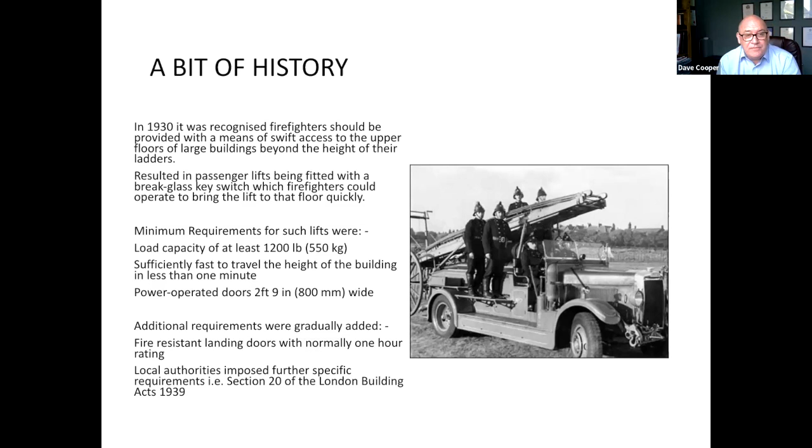So common standards for lifts were formed into BS 2655 Part 1 1970, which specified requirements for firemen's lifts. 2655 was the general standard for lifts, and in 1979 this was superseded by BS 5655. This required a larger car size, as I said, 630 kg, and improved protection by the building of firemen's lifts, which I'll cover in a minute. Published in 1986, BS 5588 Part 5 included the first requirements for a firefighting lift. So not a fireman's lift, a firefighting lift. And I will go through the differences shortly. And revisions were updated in 1991 and 2004.

In 2008, there was a shift. The contents of 5588 Part 5 were incorporated into BS 9999, which is about fire safety in buildings. And 9999 didn't contain the requirements for a firefighting lift. It just generalised about the requirement for one. But it does still talk about the fabric of the building, compartmentation and that sort of thing. Next slide, please.

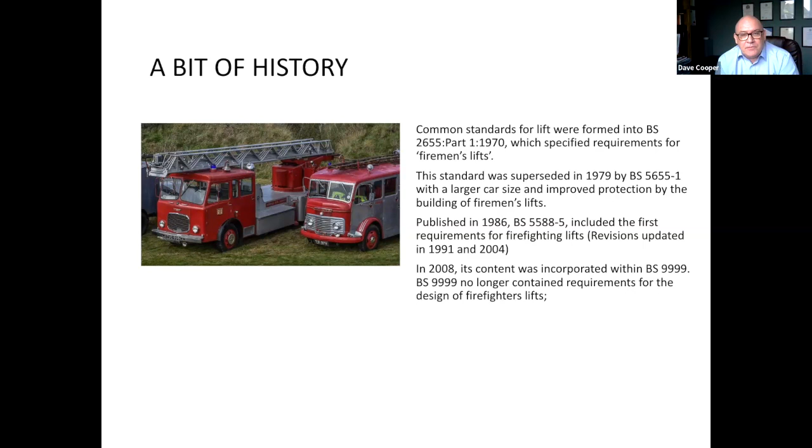So when EN 81 Part 72 came out in 2003, this was the first European standard for firefighters, BS EN 81. BS means it's been adopted by British Standards, EN means it's a European norm, so it applies all around Europe, whereas BS 9999 and 9991, which we're just about to cover, they've only got a BS in front of them, so they're parochial to Great Britain only.

So since EN 81-72 came out, BS 9991 has also been published, and that covers residential buildings. Incidentally, there is a 9992 which covers railway buildings, but that's outside the scope of today. EN 81 Part 72 was further updated in 2015 and 2020. You can see the standard there on the right. So you can see there have been some shifts.

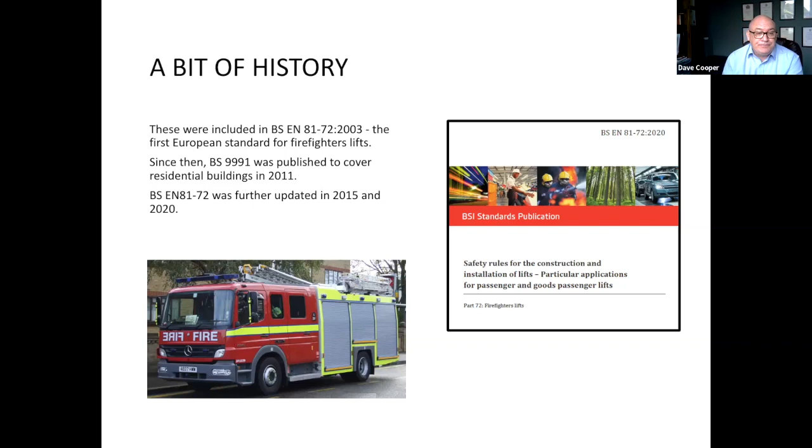So the Fire Safety (England) Regulations 2022: for lifts which fall under these regulations, the responsible person must undertake routine checks of any lift that is for use by firefighters and evacuation lifts. These are checks that the lift is in efficient working order and in good repair. And Andrew will cover these in detail later on. They include weekly, monthly, and an annual performance inspection.

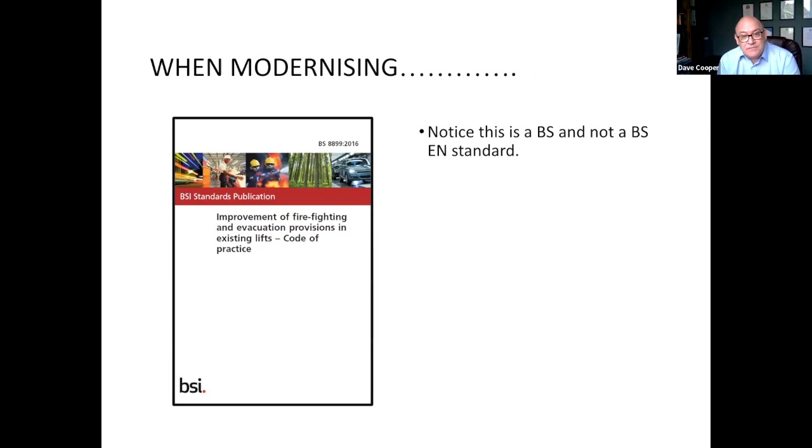So let's have a look at the difference between a fireman's lift and a firefighting lift. So a fireman's lift is now basically an obsolete term, but the facility is often retained in older lifts that are being modernised or upgraded and have the facility. The system is extremely simple in that there's a switch at the main floor, which when operated, causes the lift to stop at the next floor if it's in travel, not open its doors, and illuminate an indicator in the lift car stating it's on fire recall service.

The lift returns to the floor where the switch is located and parks with its doors open. The lift will then only respond to a call placed on the system within the lift car and will go to that floor and park with its doors open. The system can be specified for new lifts or those being modernised, but must not be confused with a firefighting lift. Next slide, please.

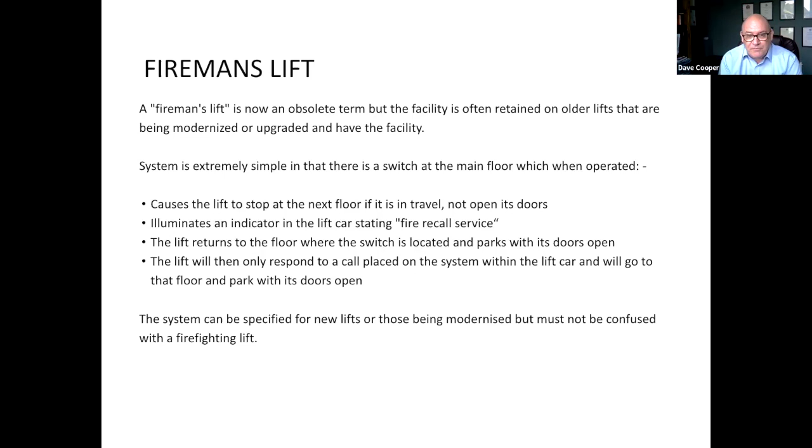So a firefighting lift, a completely different animal. A firefighting lift must have the following safety features as a minimum. Minimum 630 kg, that's an 8-person lift car. Minimum car interior size of 1400 by 1100. It must travel the height of the building in less than 60 seconds. That includes acceleration and deceleration.

It must have automatic power operated doors, at least 800 millimeters wide and 2000 millimeters tall. Position indicators fitted inside the lift car and at the fire service access level. There should be a two-way intercom provided between the machine room, lift car and fire service access level. An emergency trapdoor should be provided in the car roof with a minimum size of 400 millimeters by 500 millimeters. The lift should not be used for goods transportation in general terms. Next slide, please.

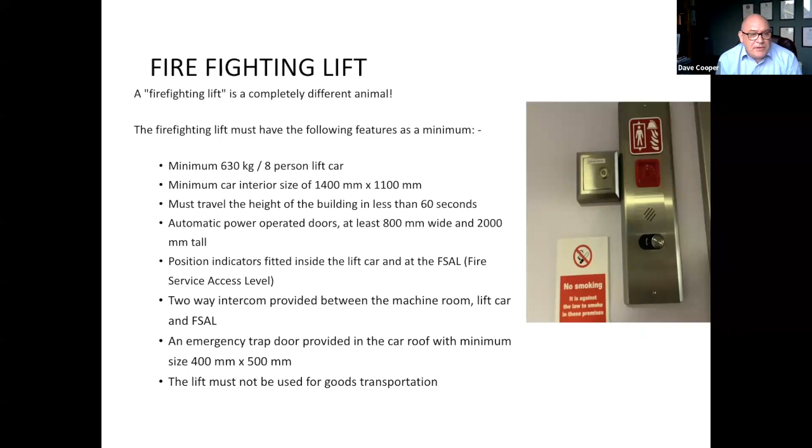So rescue shall be available from both inside and outside the lift car. So there could be a ladder stored inside the lift car, for instance, or on top of the lift car. Buttons shall be protected against water ingress. A firefighter's hose emits 25 litres a second of water. It's quite forceful. Electrical equipment in the shaft shall be protected against water ingress. An audible fire alarm must be fitted to alert a maintenance operative of the firefighter in need. If they're maintaining the lift at the time, they should have heard the fire alarm within the building, but they should get an indication that the lift is required.

A secondary power supply must be provided. The shaft must be protected from water ingress by drains and/or ramps. A peekaboo control system when on firefighting mode shall be included. A peekaboo control system is very different to the old system on the fireman's lift, where the lift just went where it was and parked with its doors open. On a peekaboo system, when the lift arrives, the firefighter must put their finger on the button and hold it until the doors are open. If in the event of a flashback out on the landing the firefighter is thrown off the controls, the doors will close and protect them.

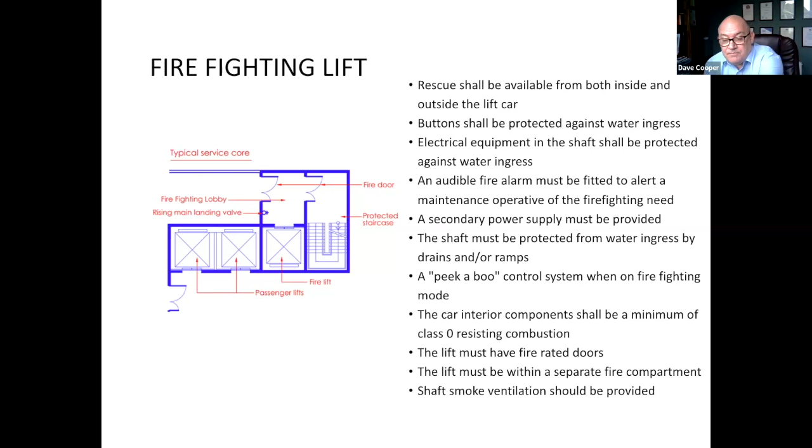There is a problem there which you need to be aware of, that the London Plan specifically mentions the requirement to comply with EN 81-76, but it's never been published, so you can't comply with Part 76.

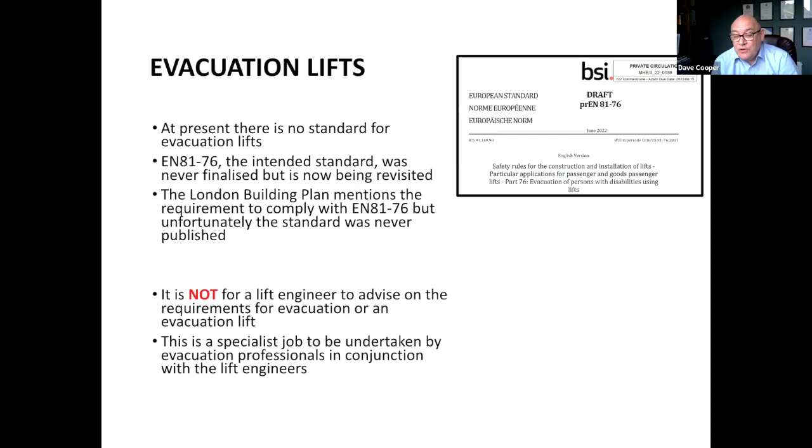The other thing I think is important to get across is it's not for a lift engineer to advise you on the requirements for evacuation or an evacuation lift. That's for evacuation professionals. A lift engineer will make the lift do what that professional asks it to do. But each building is individual, needs to be risk assessed and must have its own plan. It's a specialist job to be undertaken by evacuation professionals in conjunction with the lift engineers. Next slide, please.

So an escape lift by definition is a passenger lift protected in accordance with HTM 05-03 to enable it to be used to safely transport staff, patients and visitors to the ground floor in the event of a fire. Clearly in a hospital environment, there's risks there. There's risks that a passenger may be bedridden, may be attached to life-saving equipment, and all of these things need to be taken into consideration. In fact, there are two sizes of bed lift under the HTM, a 26-person and a 33-person, which are very, very different to the 8-person lifts we've been talking about before.

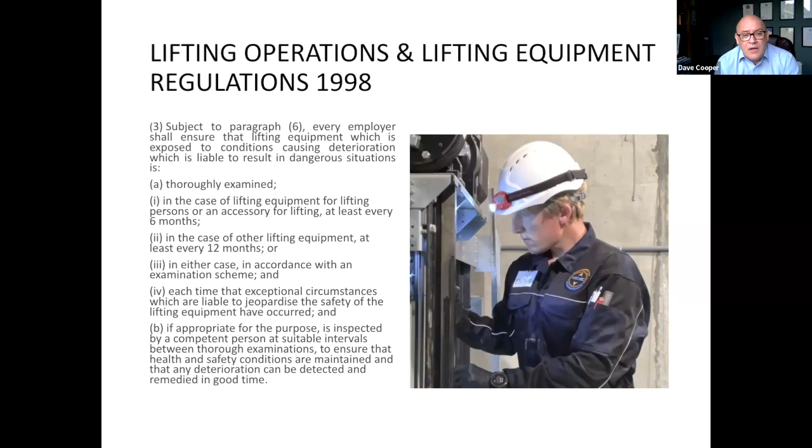Next slide, please. So hopefully from what you've got from me, you can identify what type of lift you have, and you also have an idea of some of the standards and legislation that apply. But if you do have any queries, do please contact us and we will assist where we can.

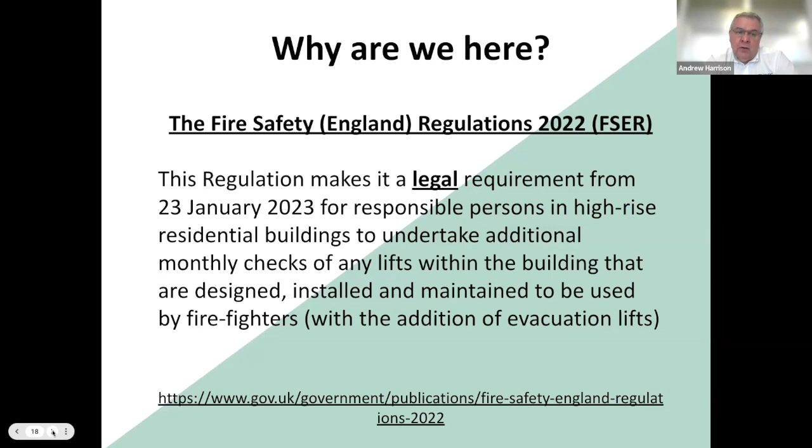The link at the bottom of this screen, which you will be provided at the end of the presentation, takes you to a government site specifically related to the Fire Safety England regulation. All the information that I've used within my presentation comes from this site, so it can be checked and reread at your convenience.

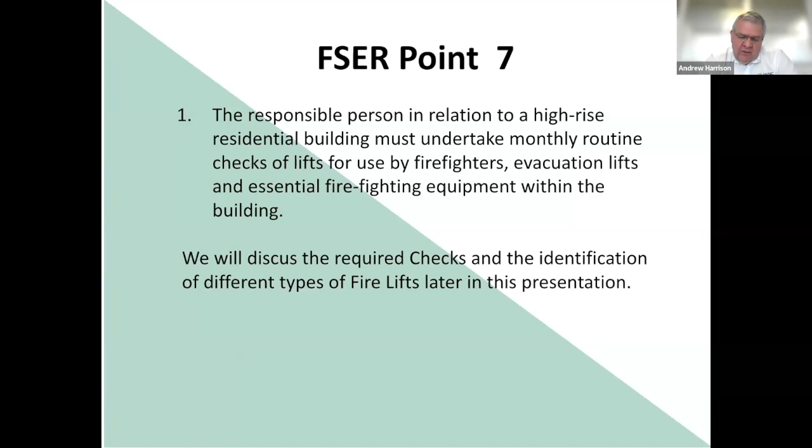So the Fire Safety England regulation, point 7 is the part that specifically deals with lifts. This is split into several paragraphs. Paragraph 1, shown above, states the responsible person in relation to a high-rise residential building must undertake monthly routine checks for lifts for use by firefighters and evacuation. There are also monthly checks required for essential firefighting equipment within the building. Later in my presentation, we'll cover the routine checks in a lot more detail.

So point 2, paragraph 2. Where the responsible person identifies any fault with a lift for use by firefighters or evacuation or any other piece of essential firefighting equipment, they must take steps to rectify the fault. This means that as soon as the fault becomes evident to the responsible person, they must put the wheels in motion to rectify the fault, can't just leave it. This may involve somebody on site doing the initial check, making sure that there's nothing blocking the lift, but will also probably mean reporting the fault to the maintenance company.

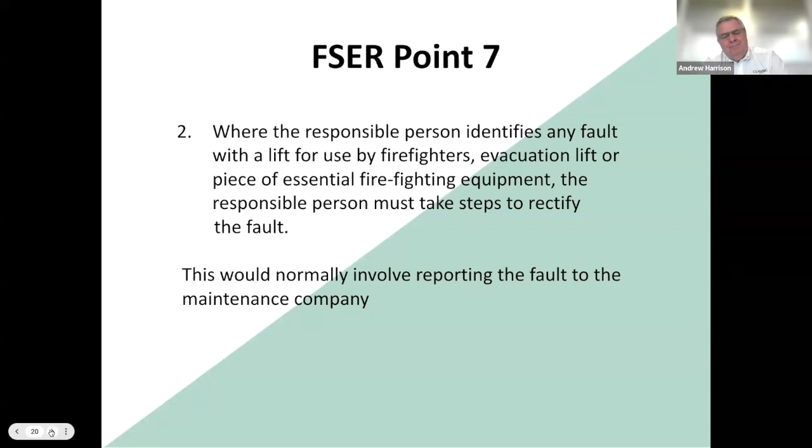Paragraph 3. Where a fault is identified under paragraph 2 which cannot be rectified within a 24-hour period, beginning with the time the fault is identified, the responsible person must, as soon as reasonably practical, carry out 2 things. A, you must report the fault to the local fire and rescue authority by electronic means. Come on to that in a minute. And when the fault's been recovered, the lift's back in service, they must report the rectification of the fault to the local fire service, again by the same electronic means.

Responsible persons should also consider the impact of the fault and inform fire and rescue service of the impact of a lift failure, for example. Responsible persons should also consider whether the fault would require an update to be made to the building's fire risk assessment and then act accordingly. The fire lift being out of service may present a problem to get people out of the building, get firemen in, so the building use may have to change during this period.

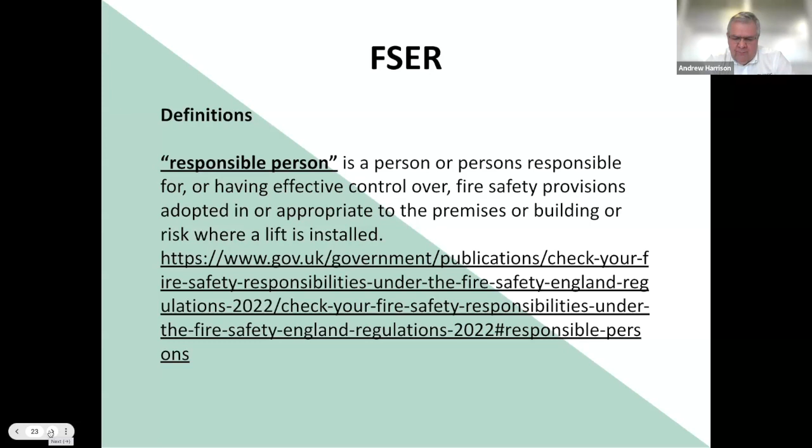So next definition. What is a high-rise residential building? A high-rise residential building is if either of the following circumstances apply. If the building's at least 18 metres above ground level, measured from the lowest ground level adjoining the outside of the building to the height of the floor in the top storey, you can ignore any plant rooms, machinery rooms on the top floor, they're not residential. Or if the building is 7 storeys or more, excluding any storeys that are below ground level.

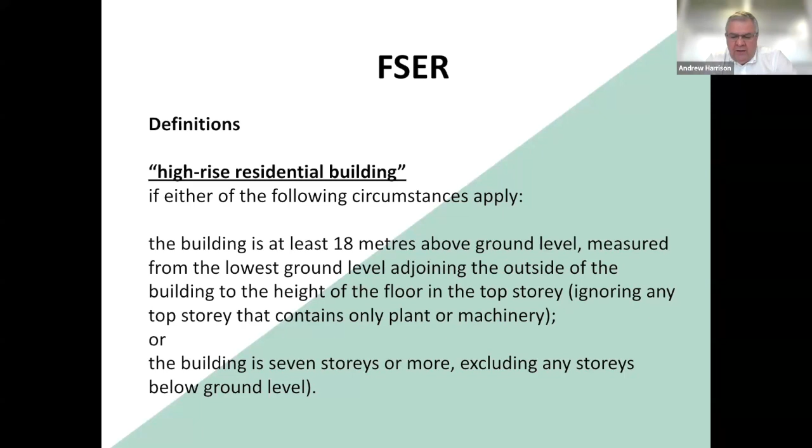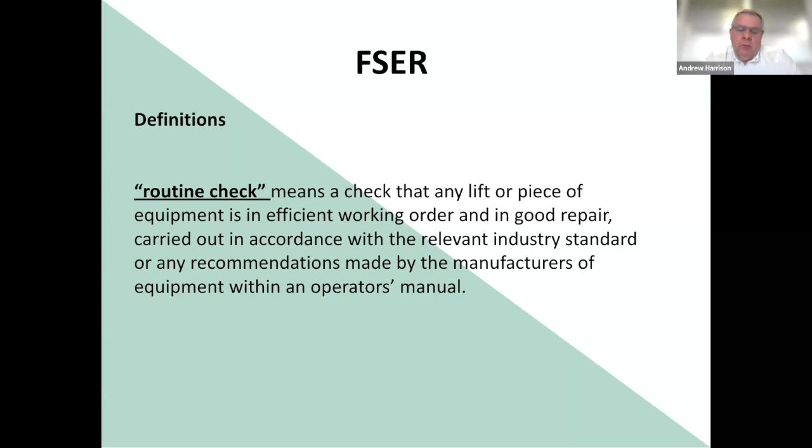So next definition, routine checks. Routine checks means a check that any lift or piece of equipment is in efficient working order and in good repair, carried out in accordance with the relevant industry standards, if they're available, or any recommendations by the manufacturers of the equipment within an operator's manual. I'll give more information on the required routine checks in the next few slides.

So, routine checks. You as a responsible person must undertake monthly routine checks of all lifts that are intended for use by firefighters. Similarly, you must undertake monthly routine checks of any evacuation lifts that are provided for the evacuation of disabled people in the event of fire.

It's not envisaged that any of the above checks that you have to carry out will need to be carried out by specialists or contractors. And these checks are in addition to the service and maintenance of the system. They are not included in regular maintenance.

The monthly checks will involve the operation of the firefighter switch or evacuation switch to ensure that it causes the lift to return to the fire and rescue service access level, after which it can then be operated only by the controls within the car. It should then be ensured that these controls enable the lift to be taken to an upper floor on which the doors can be opened and closed from within the lift car. Peekaboo system, as Dave described earlier. You should also ensure by means of a random check that the landing controls are disabled and cannot call the lift to the floor in question.

All of the comments I've made are taken from the UK government guidance document, Check your fire safety responsibilities under the Fire Safety England regulation. This document is available online following the links given. Again, it's not envisaged by the regulation that any of the above checks will need to be carried out by specialists or contractors. And again, they are in addition to the maintenance.

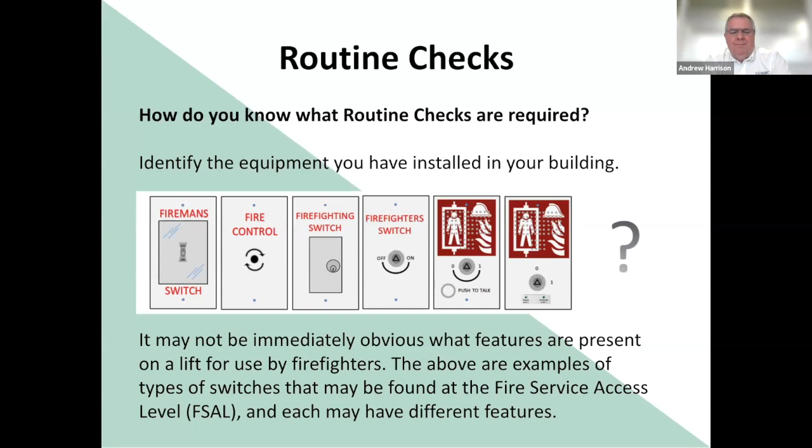So, where a lift for fire service use needs to be classified and checked, a full check of the lift features using BS 8899, the standard mentioned earlier by Dave. Annex A provides a checklist for this, and this should be undertaken by a competent person. This is something Classic and others can help you with.

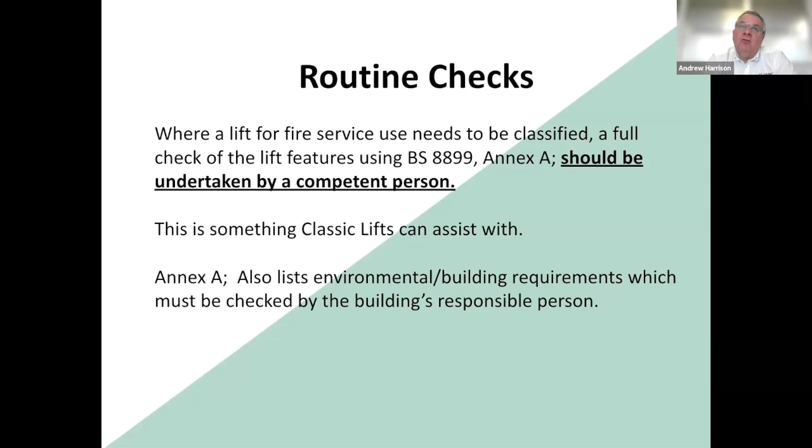Annex A also lists environmental building requirements, which must be checked by the building's responsible person. So the checks have to be carried out in conjunction with the expert, not solely by the lift expert. So we've identified what lift we have. We know what checks or what the outcome of the check should be. Now we need to carry out the checks and record what we do.

So until the reporting templates for these checks are formally included in BS 8899, which they're not at the moment, the following may be used as a basis. The next few slides show examples of routine checks recording templates. These templates have been produced by LEIA. LEIA is the Lift and Escalator Industry Association. The link below takes you to their website, and there's excellent information for lift owners and responsible persons.

So we'll quickly show you some of the templates that come up. You won't be able to read all the writing on them because of the size, but these will be provided at the end of the presentation for your use, or can be downloaded from the link previously.